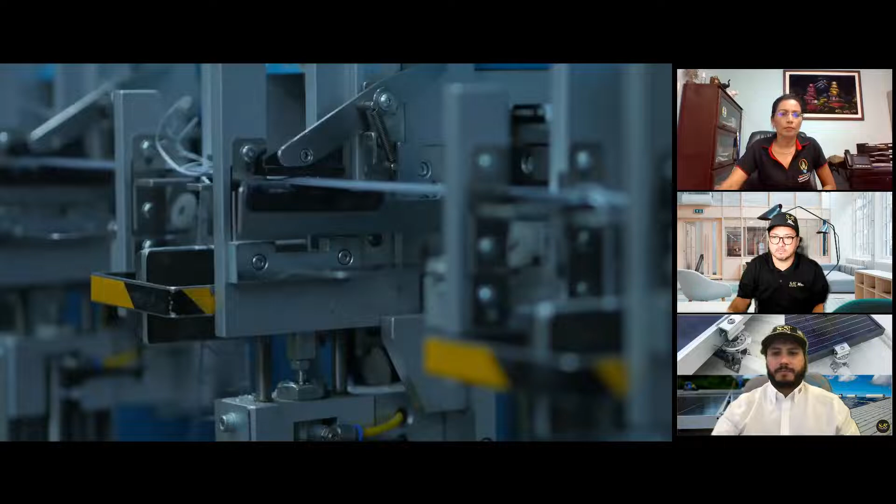We're proud of the USA, and we do prefer to manufacture in the USA, but moreover, we manufacture in our own facility. We control every aspect of it from soup to nuts. I'm very, very proud of that, and my employees are proud of that, and they strive towards that. Those people want to make good products because they stand behind it. Their names are on every box of part that goes out of that plant. They know what they're doing. Our name's on everything and our reputation's on everything, and that means a lot to us.

All of the employees are part of the family. They understand what they want to do, what they need to do, and we empower them to make some of their own decisions. We want our team to feel a sense of ownership, and that's what makes them more valuable to the company as a whole. They want to know why and how it's used, and because they do know why and how it's used, they understand how important it is to make it the quality product that it is.

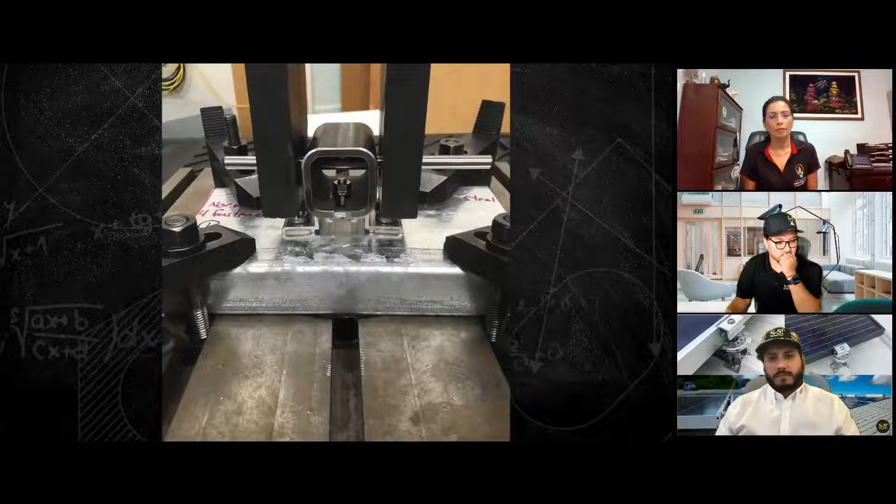We have a track record of doing what we do. There may be a couple of competitors who have been in business for as long or longer, but they can't copy that track record. They can't copy all the certifications that we have. They can't copy all the lab testing that we've done, and those kinds of things are important. We're in a constant program of innovation and improvement. We're changing and we're evolving and we're maturing and we're upping our game in every area of our business.

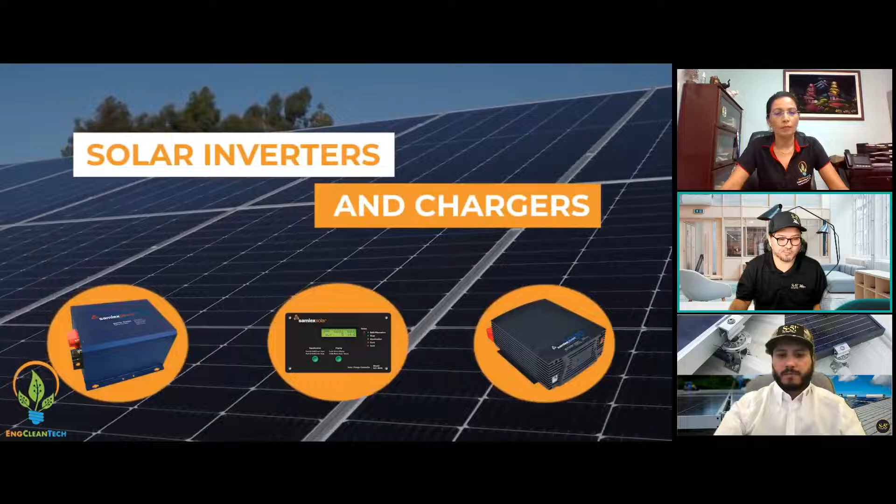Good morning, are you guys hearing me? Good morning, everyone. My name is Tara Manik, and I'm the Managing Director for Engineering and Clean Technologies Limited. We are happy to partner with S5 to host this webinar on the solar railless mounting, and to showcase the advantages and the applications and the benefits to its use in the solar industry. I will now hand over to JC.

Okay, thanks Tara. So a little bit of introduction. Engineering Clean Technologies are a new distributor in Trinidad and Tobago, that area, and that's why we are doing this webinar, in order to help with all the markets in that area and having a stock, which is something that we're going to discuss during the presentation, but we're going to try to keep stock in that area so it's easy for you to use in our products.

Okay, so a little bit of introduction of S5. I'm going to introduce our team that works internationally for Latin America and Europe, including Caribbean. Which is Alex Fuentes, I introduced you already, which is our field specialist. So you guys have any projects that need a bill of materials or anything like that, he can help you with all those things. We have Susan Guerra too, who is our marketing coordinator for LATAM, and she's helping us with all the marketing material that you guys need, or any image or whatever you guys need on videos, resources too.

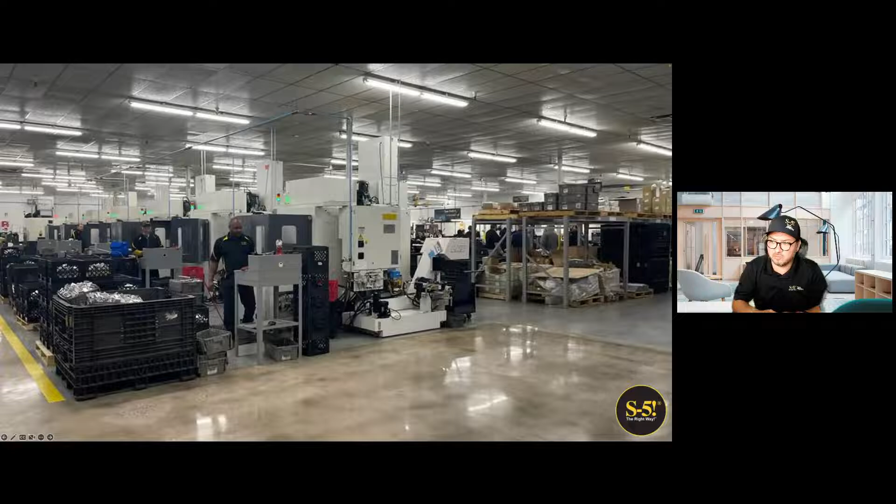Here you can see the interiors of our manufacturer where we control the whole process. This is critical for us. We are a manufacturer, we don't stock the products ourselves — we stock the products with our local partners and local distributors all over the world. Here you can see we have around 180 employees in total. And here's some of the shifts of the manufacturer, but we are continuing growing in the market and continue hiring more people as well.

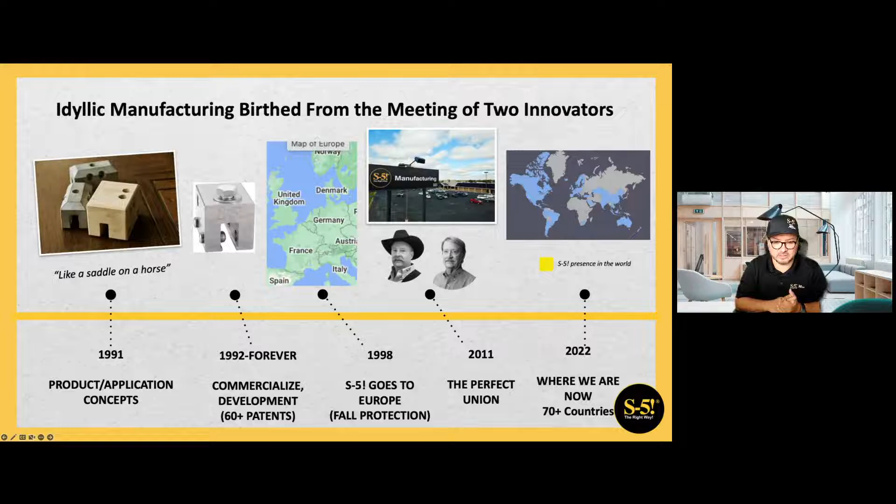We just focus on metal roof because that's where our expertise comes from. We don't do attachments for any other kind of roof, just metal roof. We know that metal roof is one of the best platforms to install solar or other products because it lasts longer and you don't have to do maintenance compared with other kinds of roof that exist in the market.

Talking a little about metal roofing types, there are two lines for us, or two types. One is the exposed fastener roof. We call it exposed fastener because you can see the fastener on top of the roof - it could be attached, you can see the screws maybe on the bottom, on the valley, on the trapezoidal shape, or on the top, on the rib of the roof.

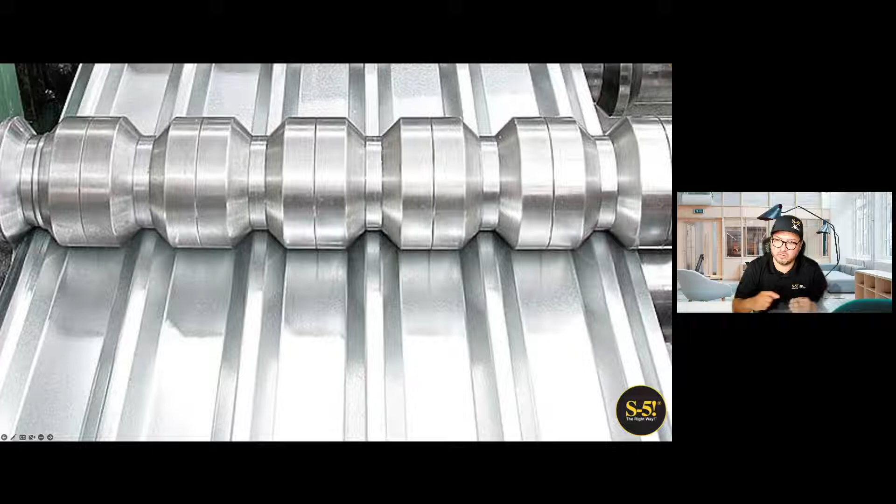This is what we call exposed fastener, and these are the most standard type of roof. They're manufactured this way - different roll formers have different shapes. The trapezoidal can change dimensions or shape as well - could be trapezoidal, or corrugated like this, undulated like this. But this whole line of products, it doesn't matter what shape it has.

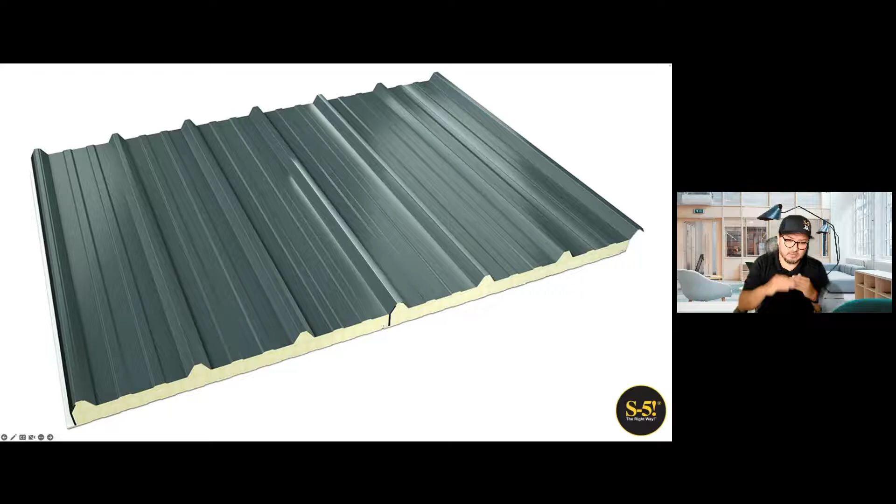If you have screws on the top, it means it's exposed fastener for us, and that means you need to perforate the roof in order to attach anything you want. We're going to talk a bit about that as well. This roof can be like a sandwich panel, or have insulation on the bottom, a double layer sheet too, in different kinds of shapes.

The other type of roof that exists is the standing seam roof, which is one of the best roofs that exists in the market. This standing seam doesn't have any screws on top - you don't see any perforation on top of this roof. You can't perforate it, you can't make any hole on this roof, because you void the warranty of the roof, and that's not really good for the owner of this roof.

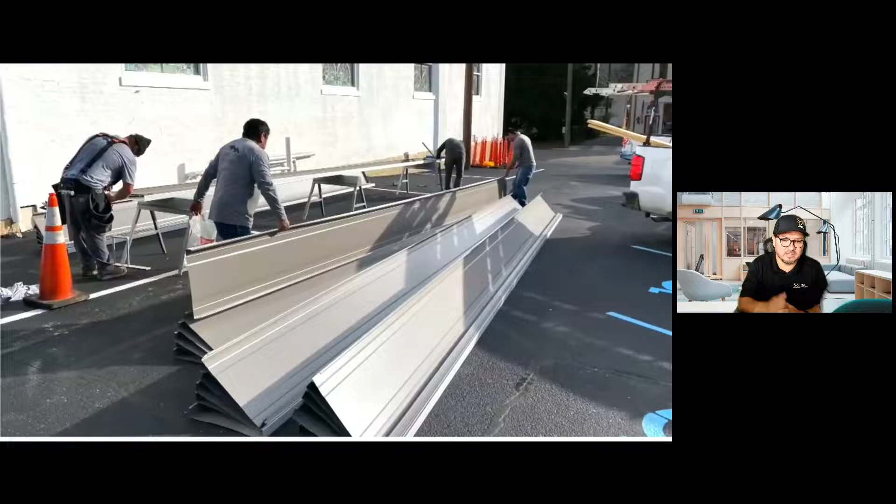These are called standing seam, and there are different kinds of shapes on the seam - these are custom made. They're made on site, on the same job, and they bring machines like this one where they make the whole tray in the field. This machine cuts the length of these trays to match the length of the roof, going from top to bottom. Different brands have different kinds of standing seam, but in general it's the same concept - you put a whole tray from the top to the edge of the roof, the bottom of the roof.

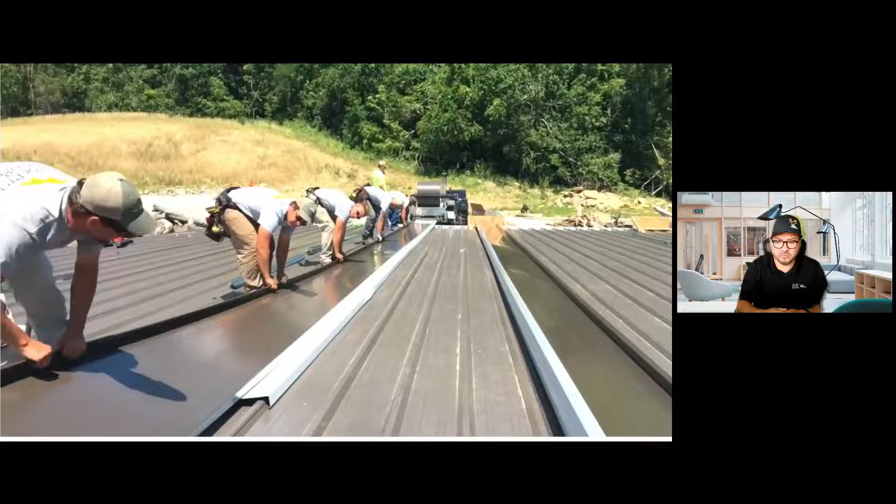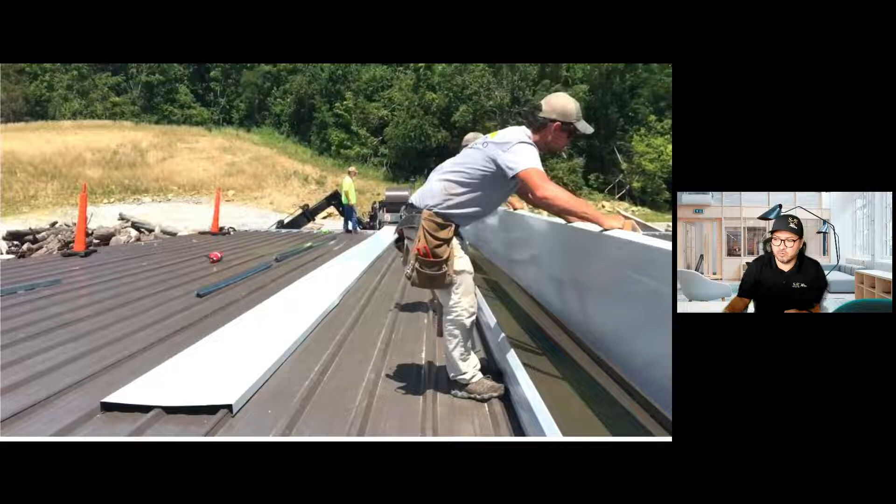So it's a continuous tray that doesn't perforate. These trays are fastened to the roof with clips - you can see the clips in the image. These clips are attached to the bottom of the roof, going to the purlin, or the wood deck or metal deck, whatever you have underneath the roof, and then you put the next tray next to it.

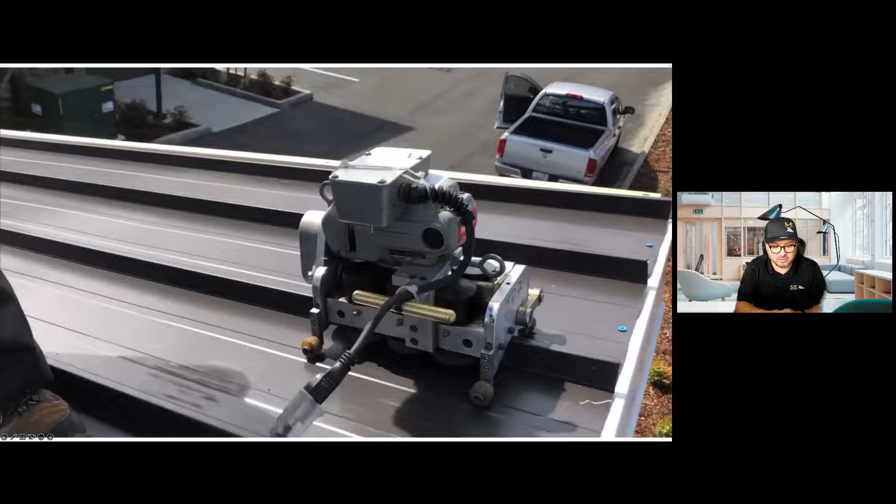After you put both trays together, there's a machine like this one called a seamer. What the seamer does is basically fold this seam, folding it and making it tight, and it has different shapes depending on the machine you're using. This roof is one of the best that exists in the market.

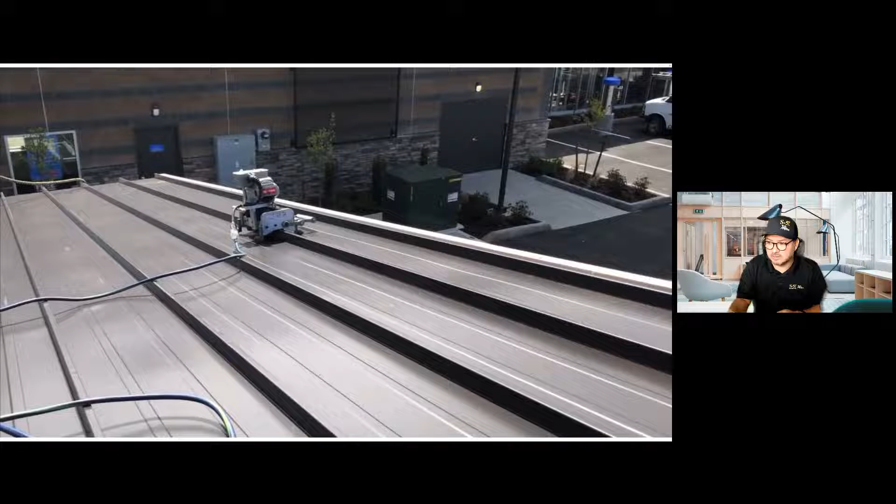There are different kinds of gauges - gauge is the thickness of the material, I'll talk a little about that as well. But this roof, you can't perforate - don't make any hole on this roof, especially if you're attaching solar to it. That's why we have a line of products that doesn't perforate it. Here you can see how they are installed.

The roof, the whole trays on the roof. You can see some polls that are showing up. You can answer yes or no, and submit that answer. Here's how it's being installed, these trays on the roof.

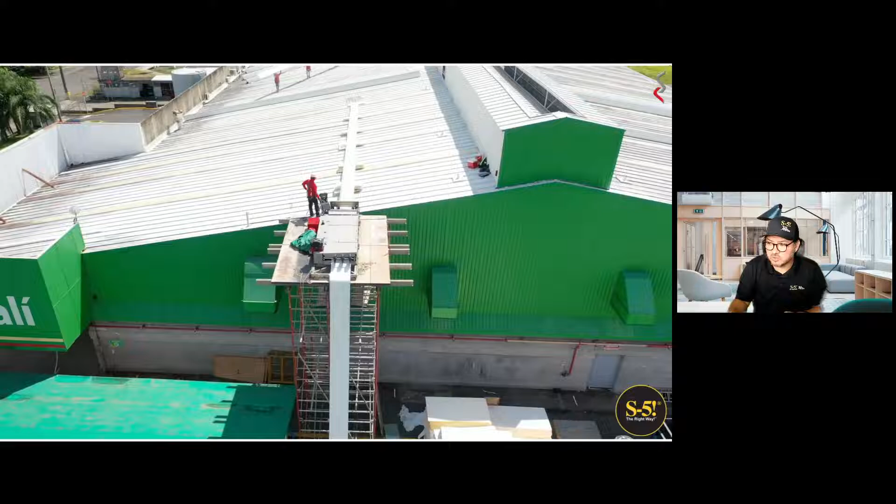So, as I mentioned, the metal roofing comes in different kinds of gauges, depending on the thickness. We have gauges that go between 22 gauge and 26. The most common ones are 26 and 24 gauge. Over 26, we don't recommend installing anything, because it's going to be too thin.

You will see that because you're going to go on the roof, and maybe the roof is going to bend, or it's going to make a hole just with your foot when you step on it. So you will see that. We don't recommend installing on gauges over 26, because it's too thin, and you're going to have issues with your solar attachment.

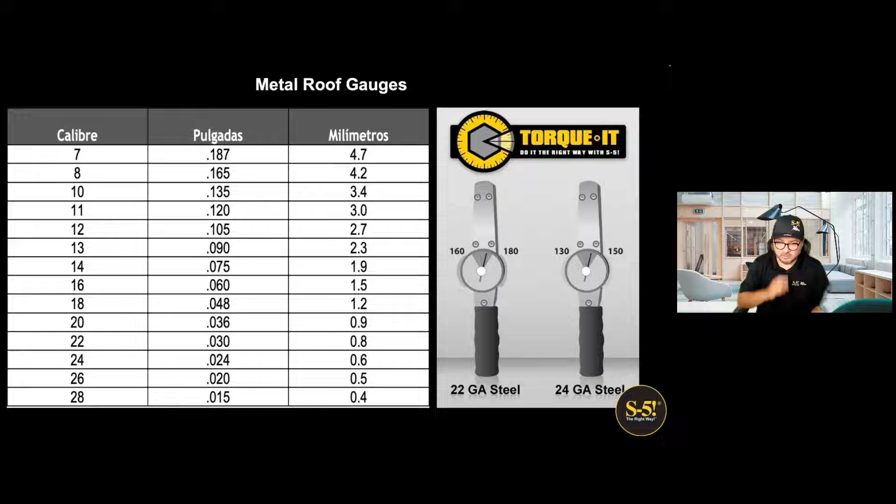And you know that this solar has to last at least 25 years on the roof. So you want the platform of the roof to last longer than that. Okay. So now that we introduced a little bit about metal roofs, we're going to talk about the different ways to attach on the roof.

From the beginning, the first installations on the rooftop, this image is from 1884. This is a project in New York. More than 100 years old, this photo, you can see how they started using the rooftop for solar attachment. And since then, it has changed a lot in technology and efficiency, not just on the modules, but also on the attachment and on the metal roof.

Okay, metal roofs are way better technology now. They are making better quality. As I mentioned, they have gauges 22 and 24 that are really thick and really last more than 30 years, depending on the location where they are.

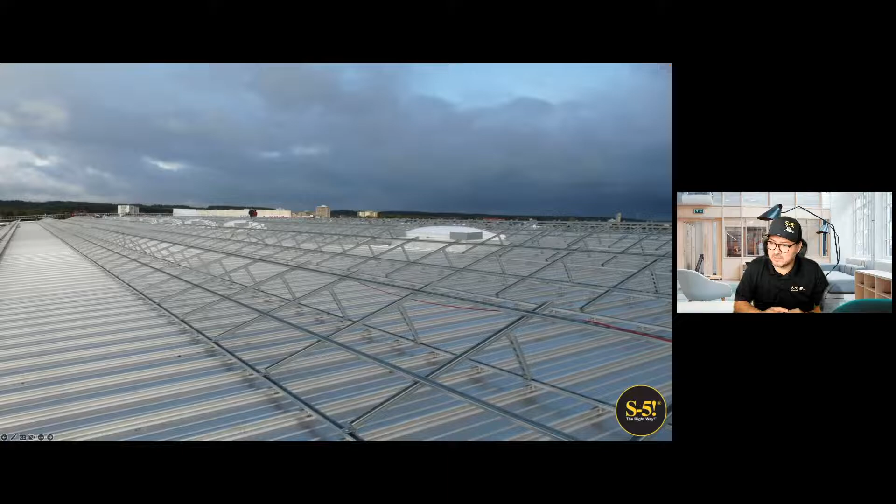So you can install in two different ways. You can install with a rail system on the roof, or you can install direct attach, basically directly on the roof without using a railing system. We're going to talk a little about that too. But for example, here you can see when you attach with rail, sometimes you want to tilt the modules a little so you can have more performance on the system.

The most important thing is how it's attached to the roof. We don't provide the railing system. We provide just the clamps so you can attach the rail to the roof. That's what we provide when we install on metal with a railing system.

Now the trend is changing from rail to direct attach, because a railing system costs more on structure, on all the railing and the aluminum and logistics and everything else. So that's why now, instead of investing, I don't know, $10,000 more on a railing system, they just do direct attach on the roof and maybe put more modules on the roof, and have the same performance that you want to get with a railing system.

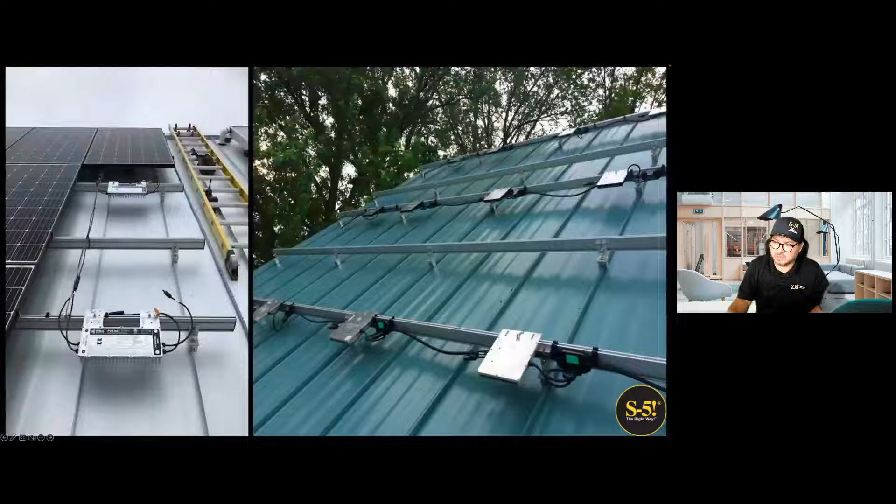Now the modules, as I mentioned, have better performance than before, so you don't need much change in degree angle to get the same performance you're looking for. If you attach on a railing system, besides doing it with tilt, you can do it flat like this. But as I mentioned before, the most important thing is how it's attached to the roof. In the Caribbean, of course, we're going to talk a little bit about the forces. When you use rail, you have more negative force on the modules compared with a direct attach.

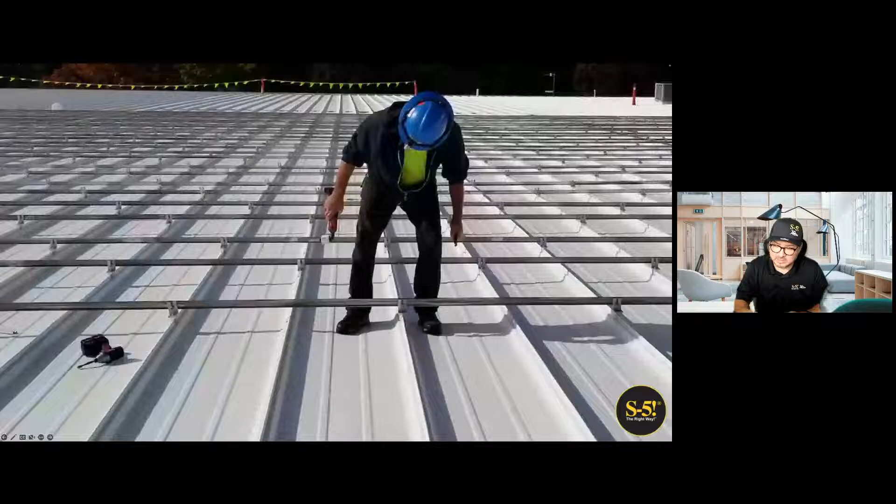Now talking about the different ways, when you attach with rails, what you can see here in the picture is like rail on top of rails. That's why the concept of direct attach is really important for us, and is a trend now in the market, because you can see you're adding more rails to a roof that already has rails. You can see on this standing seam roof, the roof already had the rails on it.

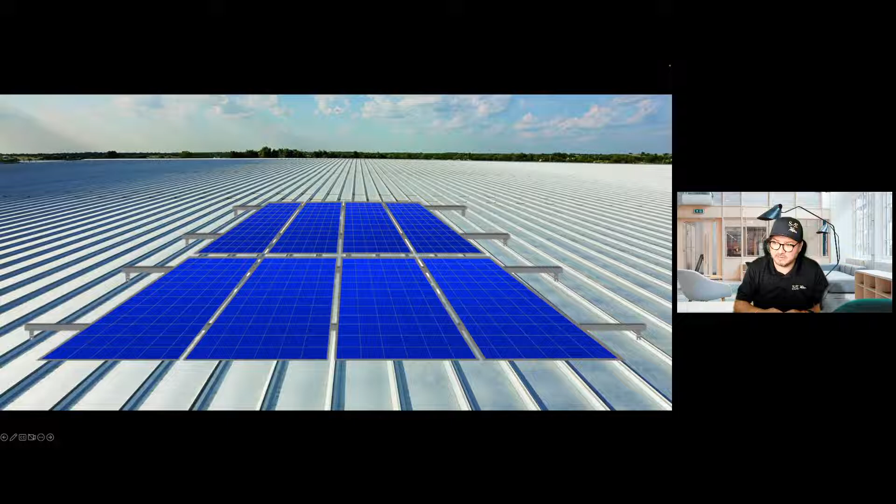So when you install modules on this kind of roof with a railing system, you put the rails perpendicular to the seam, and then you put the modules parallel to the seam, like this. This is how you install with a railing system, which everybody has been doing for a long time. Now the different technology that we have been using for almost 10 years is direct attach, on the same standing seam roof.

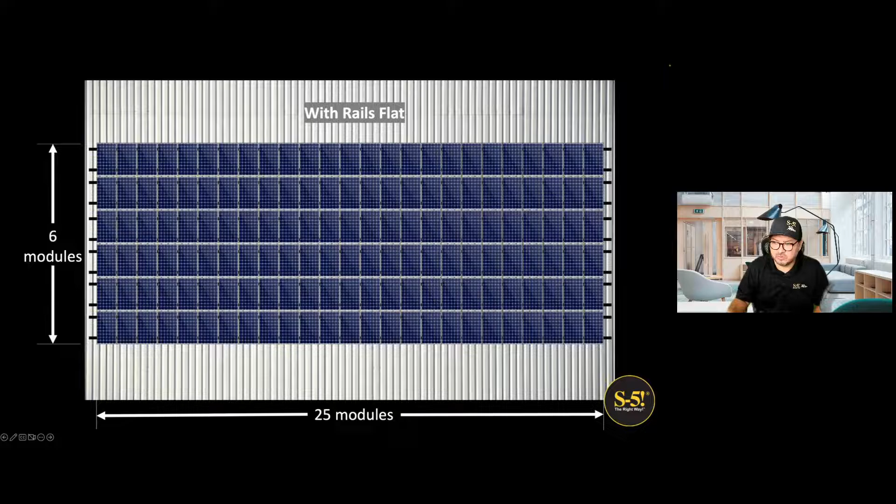So you can see here the modules are six lines of modules by 25 columns of modules. That is 150 modules there, with a rail system. If you want to do it with direct attach, no railing, just clamps directly on the seam, it's the same 150 modules. What changes now is you have fewer columns. You have 15 columns, and more lines, like 10 modules by 15 columns. That's the only difference, but you have the same 150 modules on this array.

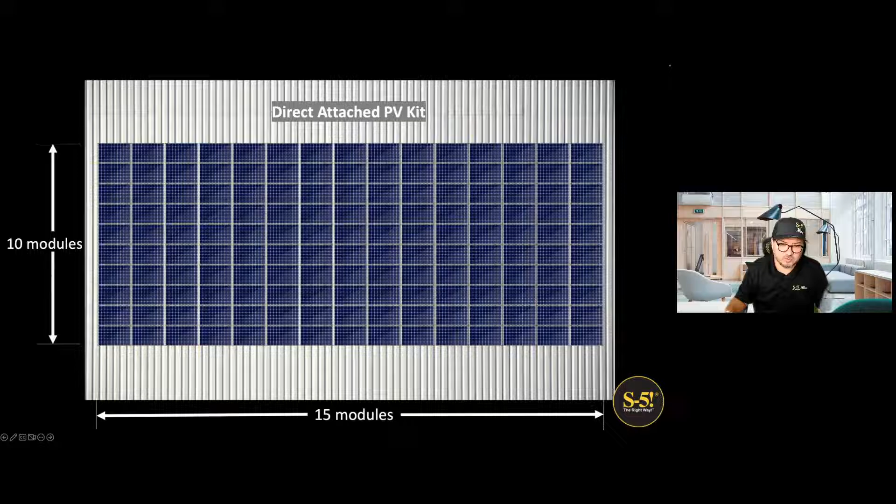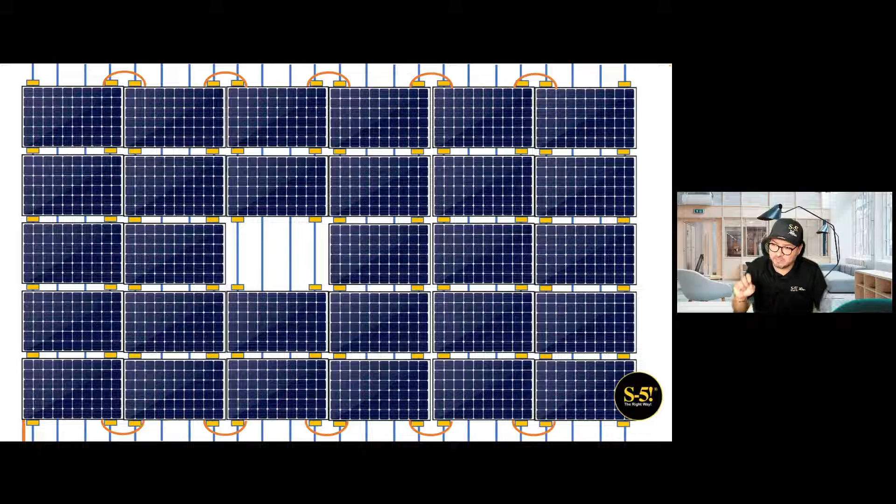To talk about the grounding on this system with the PV kit, we have different accessories that we use. You can see here all these yellow squares are basically our PV kit that I showed you before. And if you want to take out one of the modules in the middle to do maintenance, the whole system is still going to be grounded, because you have the PV kit, the disc, but besides that you put some bonding jumpers, which you can see in orange. Those are the bonding jumpers that we can use.

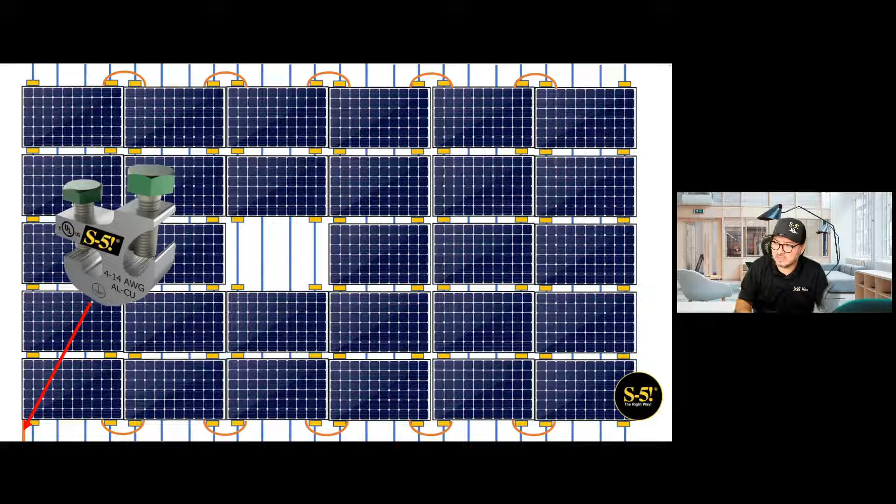Here are some of the other accessories that we use for grounding. You can see here the bonding jumper is the one in orange. We have clips that attach to the module underneath for wire management, and we have the grounding clips that take the grounding of the whole system back to the building, and the PV kit. With these 4 accessories, you have grounding for the whole system on the roof.

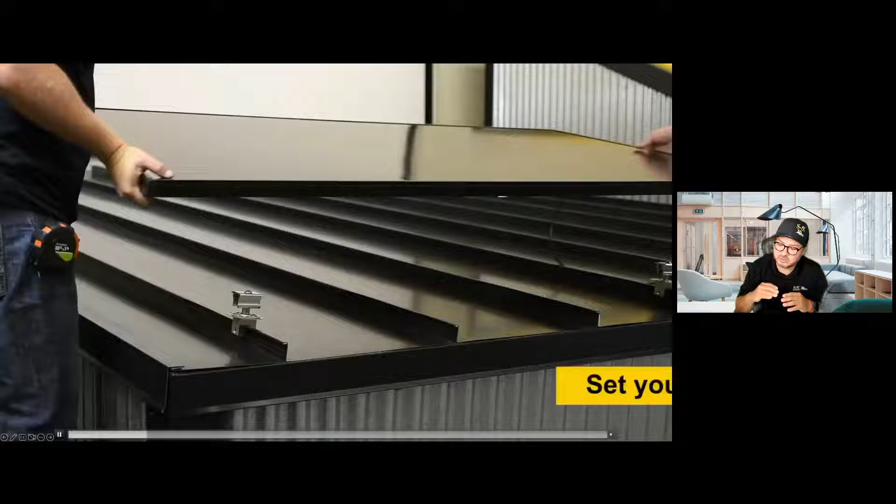Here we'll show you a short video about how to install the PV kit on standing seam. You can see the clamps. The first line is important, because it has to be square with the edges of the roof. When you square that line of modules, then the rest is going to be pretty easy, because the same module is going to give you the square of the roof. So you don't have to waste time squaring the whole roof in order to install the modules.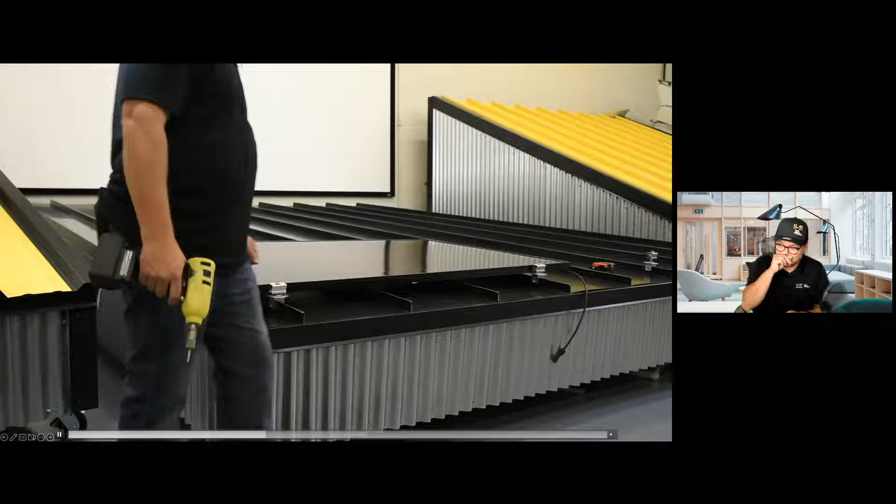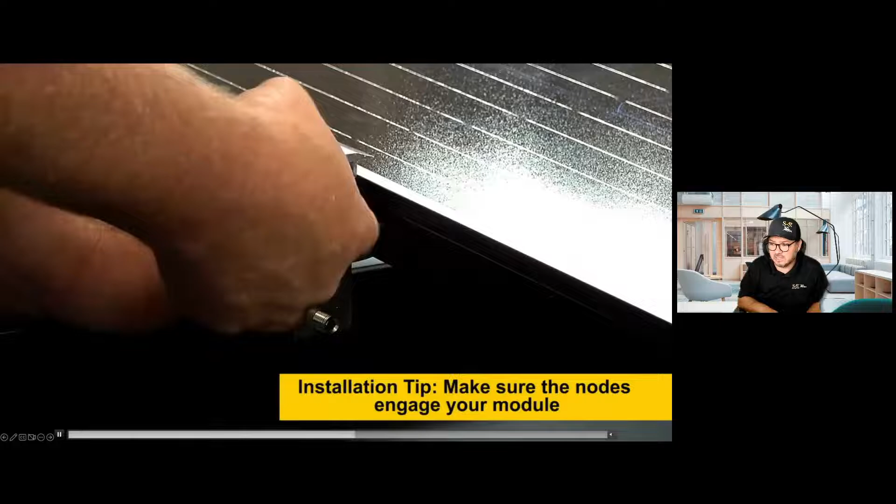So you just need to make sure that the distance is equal on the edges of the roof, and then from there to the top is going to be pretty easy. The installation with PV kits on a standing seam takes around a minute and a half per module. So it's pretty fast.

When you install on exposed fastener, where you have to drill the roof, it takes around 2 to 2.5 minutes per module. Compared with other kinds of systems like short rails, it is more than 3.5 minutes per module. So you are saving a lot of time in big jobs.

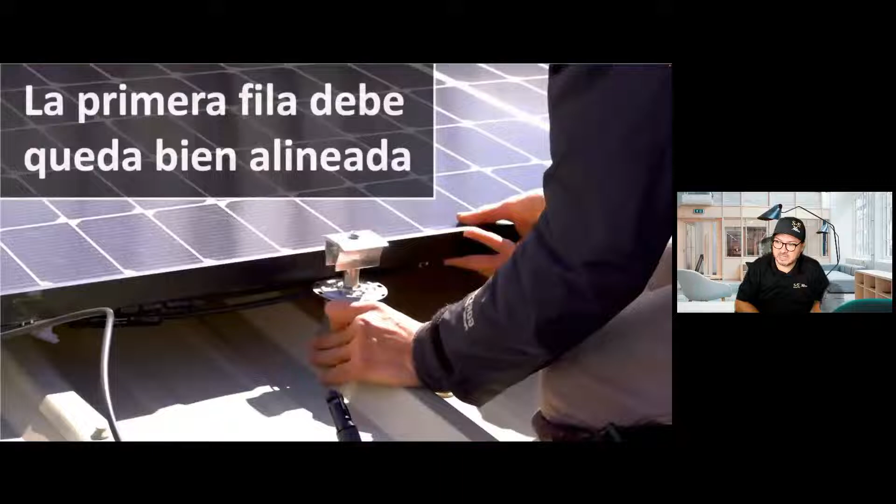So this is a standing seam roof with clamps, and we also have the same one but with brackets, which is an exposed fastener roof. With this exposed fastener, we use a different kind of bracket, but it's the same PV kit. It's just the bracket that is different, and the same concept. The first line has to be aligned with the roof. When everything is aligned, then you start installing the whole columns directly on the roof.

The installation is pretty easy. It's just taking a little bit longer because you need to screw down all the screws on the brackets, compared with the standing seam.

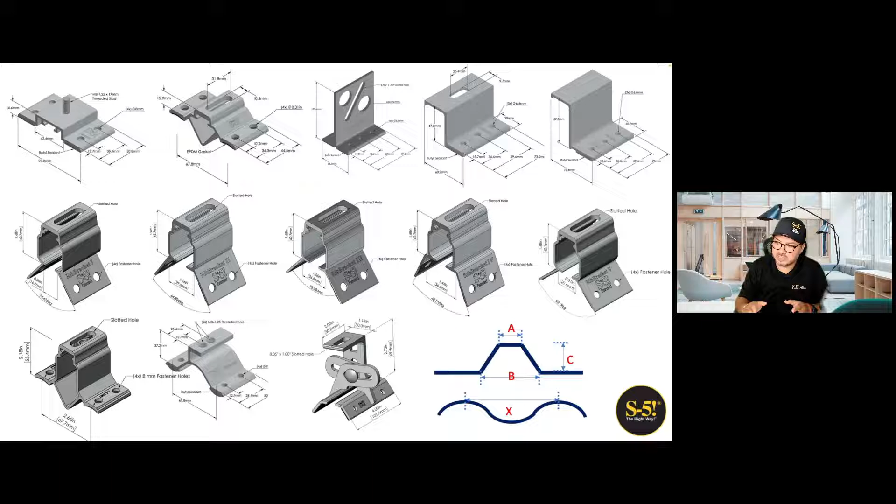And also, for example, if one of these rib brackets doesn't fit the dimensions that you have, we have our Protea bracket. We call it Protea because it means universal, so it adapts to any kind of trapezoidal shape. With this one, you can see it has an L shape on the top. That L shape we call L foot.

You can install rail on the top of this. It could be fastened on the bottom of the rail or on the side. It could be attached with this Protea bracket. All the rib brackets here in the middle, from 1 to 5, can only be installed with PV kits. You cannot install rails on top of those rib brackets because there is too much moment on the screws, because it's attached to the sheet only.

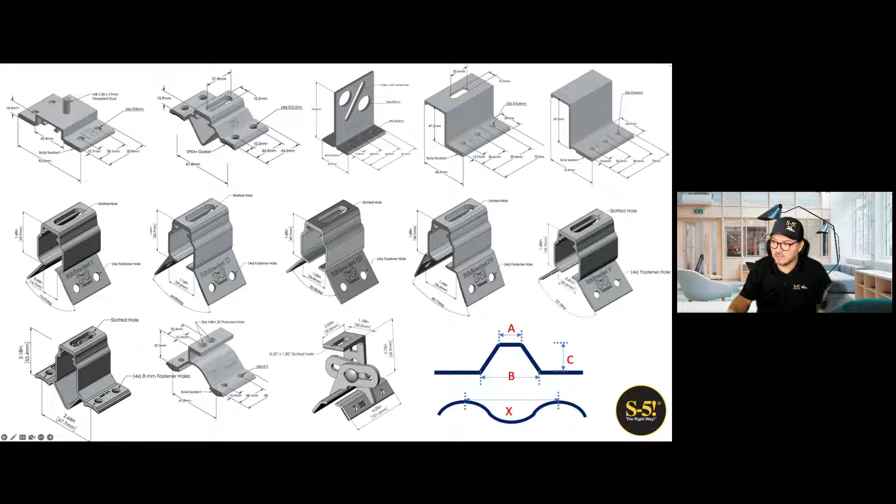What we do, compared with other solutions, is that we attach on the side of the rib. You can see here we created this rib bracket 5 for a roof Ternium TR 101. So we attach on the side instead of the top of the rib. When you attach on the top of the rib, you have less strength for negative force.

Negative force is basically the force that the wind has on the modules. So we have positive force, which is the weight, gravity, and we have negative force going up, which is what the wind does to the modules. On these, we use needle point screws like this one. We don't use just any kind of self screws. These are self-piercing screws, but they are needle point.

So what it does, this needle point, and you can see here in this image that even the screws, the tiny part of the attachment, have our logo on it, S-5!. It's because of the warranty. As Rob mentioned in the video, we put the name on everything. We are the only one that puts the name on everything because we are proud of the company, and also we know we have the best warranty in the market.

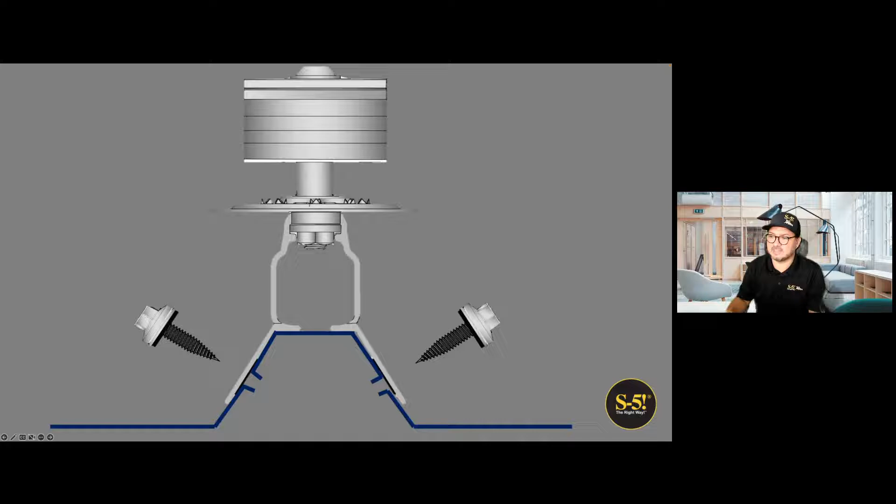Here you can see how you attach on the sides. So when you attach on the sides of the roof, what this self-piercing needle point screw does is it creates this kind of teeth underneath the roof, so it gives you more strength for negative force from the force of the wind on the modules.

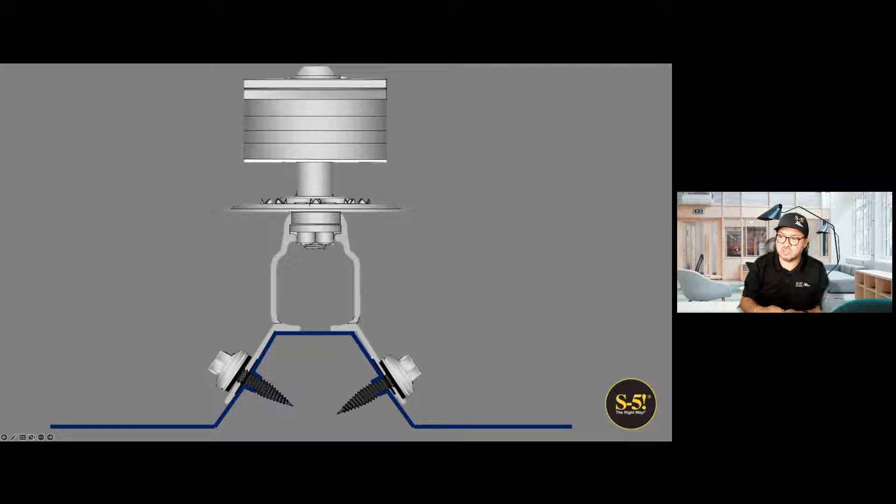So these self screws, the head is stainless steel, and the body of the screws is carbon steel. The carbon steel has a lot of strength for lateral shears. So if you want to break the attachment, you need to basically cut the screws. The only way is to break every screw and basically break the roof before anything else.

So that's the difference when you use, for example, short rails that are just attached on the rib. With short rail, you have less resistance for negative pressure compared with the PV kit. So you can see it here.

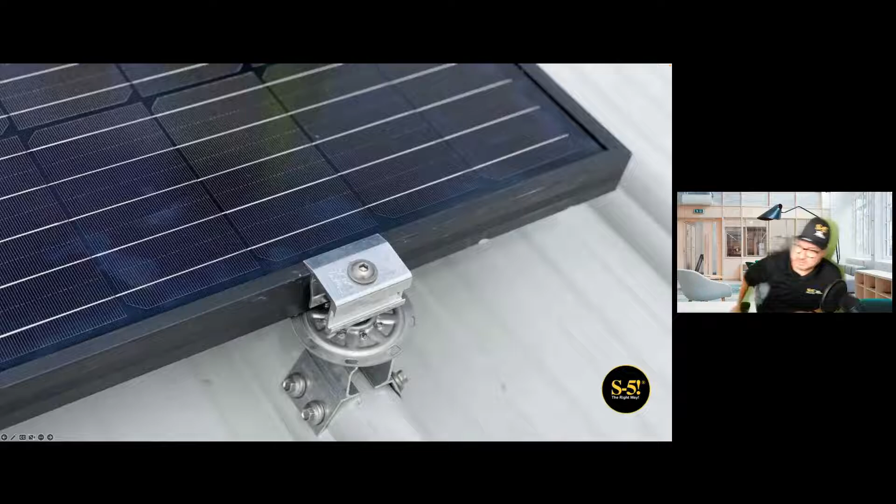If you see this kind of roof in your market, this is perfect, because these roofs are designed to isolate the heat or the cold from inside the building. So you don't want to perforate or install anything that passes this insulation. Our system is attached only to the sheet, not to the purlin.

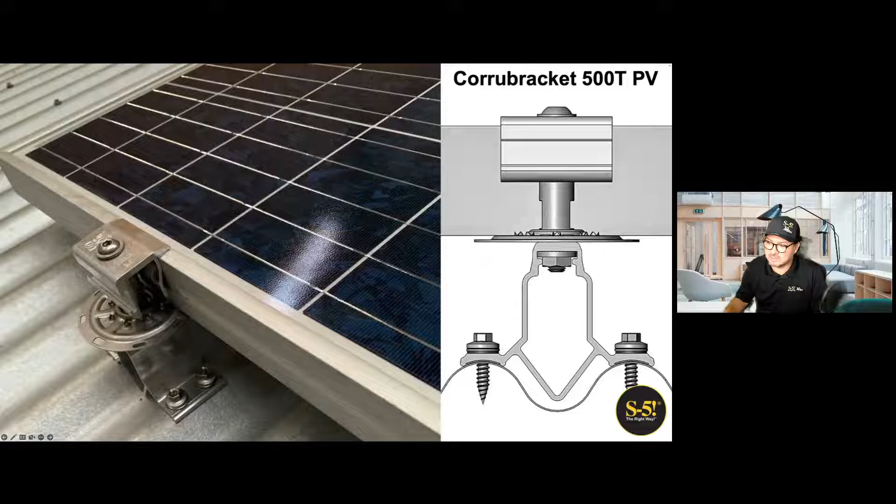The same thing, we use a CorruBracket for this kind of roof, which is more common in residential but not in commercial, because it's not the best roof, but we've seen it sometimes in residential areas: the undulated roof. Also with our brackets, you can do wire management pretty easily.

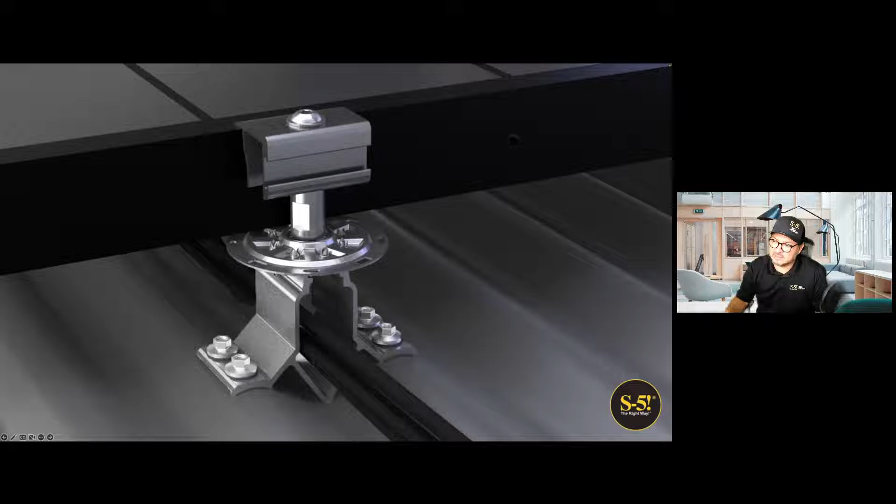And also I know one of the questions that most building owners and installers are concerned about is waterproofing, that it doesn't leak the roof, especially in areas that rain a lot, like in the Caribbean, like in your market. You want better products with a water seal that doesn't leak water inside the building. That's why we do the best testing in the market, which is the ASTM E2140.

This test is static water pressure. Basically, you put the bracket with just the seal that we provide, the seal that comes with the brackets and with the screws. We do the test with just those seals, and we put it under 15 centimeters of water pressure for 6 hours. After 6 hours, it can't leak anything. If it leaks, it doesn't pass the test.

So this is an image of the testing that we do, and this is the hardest test that you can use on this kind of product, because there is another one that is a dynamic test. That's basically water running on the roof, but it doesn't have any pressure. Here you have 15 centimeters of pressure on each bracket.

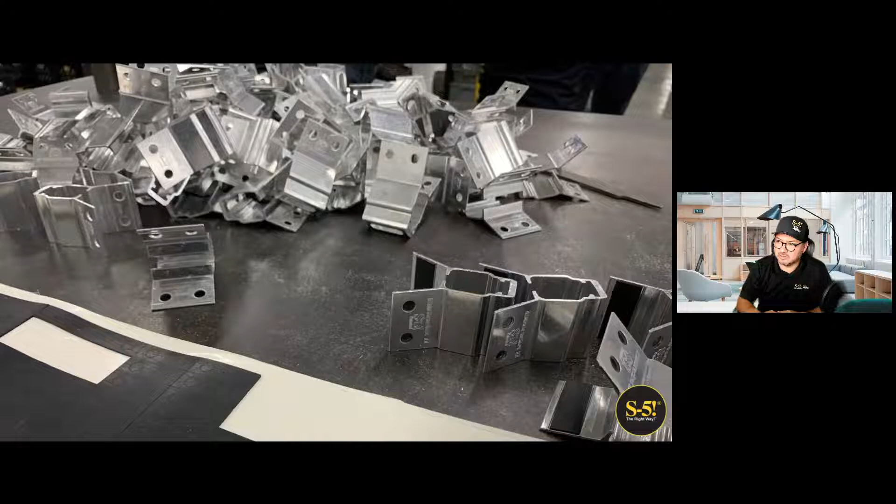So here you can see that the rib bracket uses a closed cell EPDM, not open cell. The closed cell EPDM is attached by the manufacturer, so we attach it directly on the brackets.

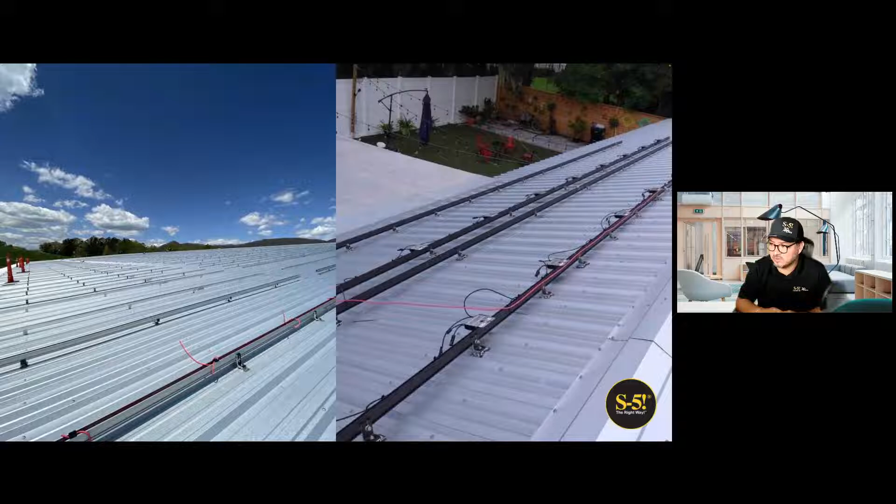So it comes with those seals already applied. Also, when you attach on the purlin with the other kind of solar foot, you can attach with rails as well, but it has another kind of seal that is like a butyl seal. It's not an EPDM. And here you can see a picture of a project installed in Jamaica.

We installed this recently. They were installing; they have not finished the job yet. It's out of the oven. This picture, we just got it. And you can see here in Jamaica there is strong wind as well, like in Trinidad and Tobago in that area. So they installed this Protea bracket with PV kit, and they installed 3 PV kits per module instead of 2, because for the strength of the roof they needed more attachment. Okay, that's one of the projects that we installed.

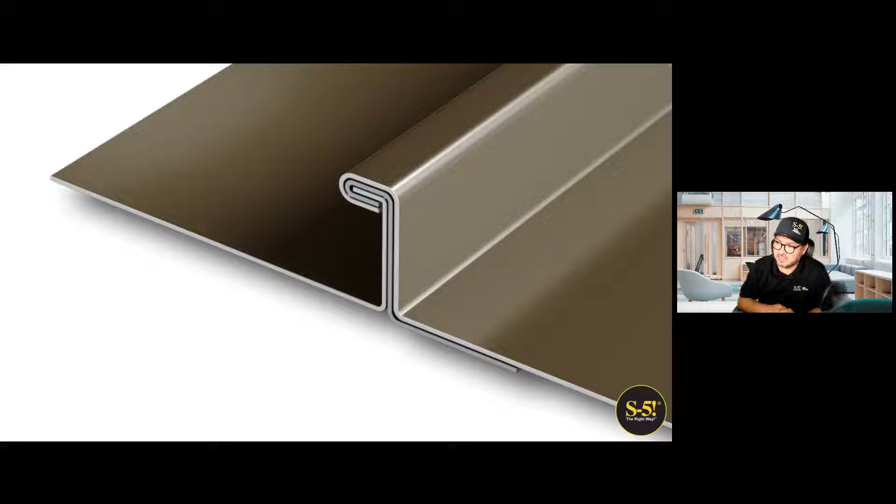And here is the standing seam. A standing seam doesn't perforate the roof. These are all the types where it could be installed. As you see here, it could be a single fold, as in this image, or it could be a double fold seam like this one. This double fold is more common in that market in the Caribbean because it's stronger than the single fold. This standing seam roof could also be insulated, like a sandwich panel.

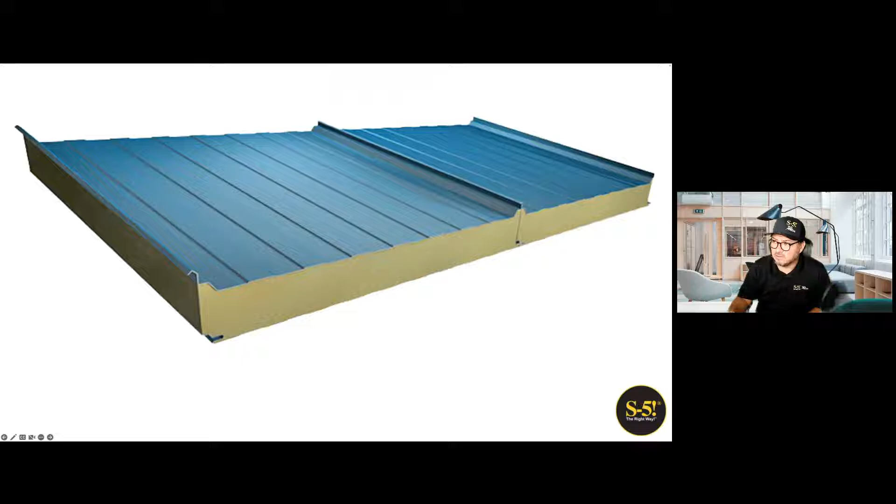On our website there are some tools: if you don't know what kind of roof it is, you can see the shape of the roof, and then see which clamp fits it. If not, just send us some pictures and we can help you. Hopefully you send images with some dimensions, some reference, so we can see which clamp works for you.

In terms of clamps, we have 2 different clamps. We have mini clamps that are made for solar, and they have been tested for negative force, negative load test. So that is the mini. We use just one set screw that goes on the bottom. And for other kinds of products that have lateral shear, for example if you're going to use fall protection, or you have an AC unit that you're going to put on top of the roof, you can use the standard clamp, which has 2 set screws like this. So it's been tested in different ways.

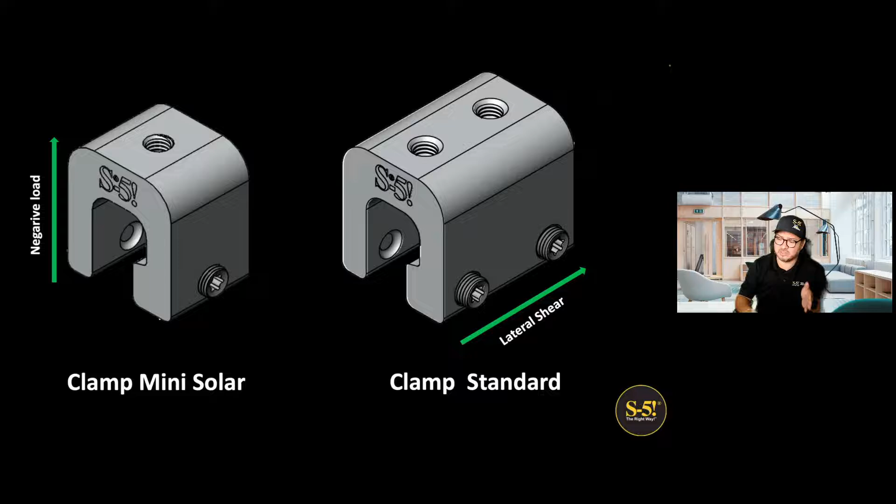And with this kind of product, in the end, it gets loose. You need to go and maybe review or check the torque on the screws, because it gets loose with time. You know that a metal roof is kind of like a living product, because it moves with temperature during the night and during the day. So again, this makes these friction products get loose with time.

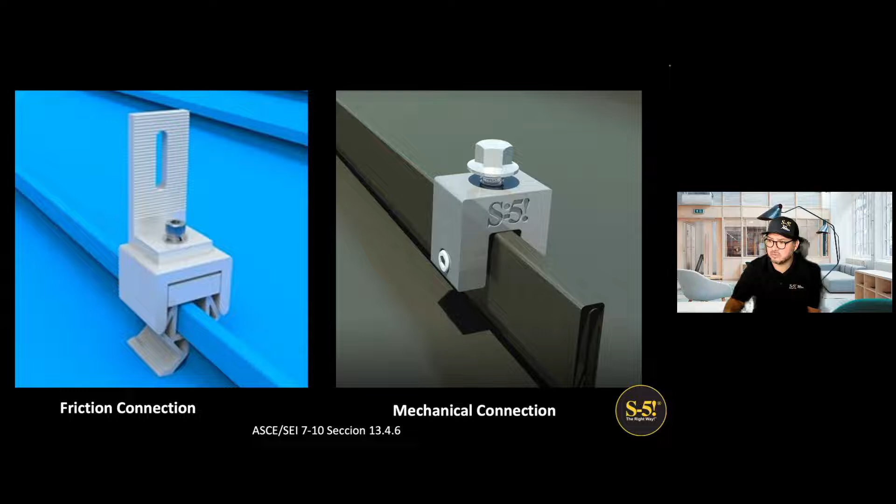Our mechanical attachment, which is our clamps, according to ASCE 7-10, uses the mechanical attachment like what we show here. What it does is the set screw has to deform the standing seam to create this mechanical attachment, and you can see it deforms a little bit, but without damaging the galvanized coating or whatever is protecting the steel from the roof.

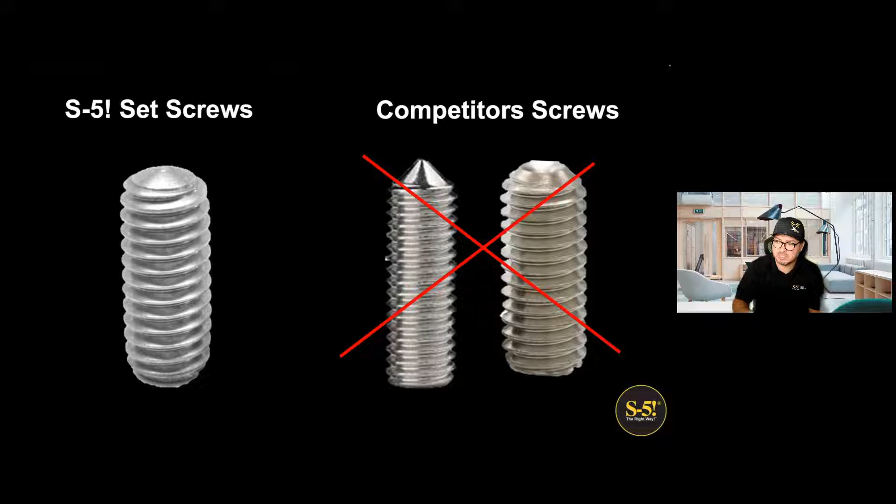That's why we have a set screw with a round point. You can see our set screw is round compared with competitors' needle points or cup shape screws. You want to avoid those kinds of screws and use the round shape instead, because cup shape screws damage the roof.

Imagine for all the clamps you install on the roof, you're going to have a lot of points of corrosion, and then you damage the whole roof on your job. So you don't want that, you want to try to avoid it.

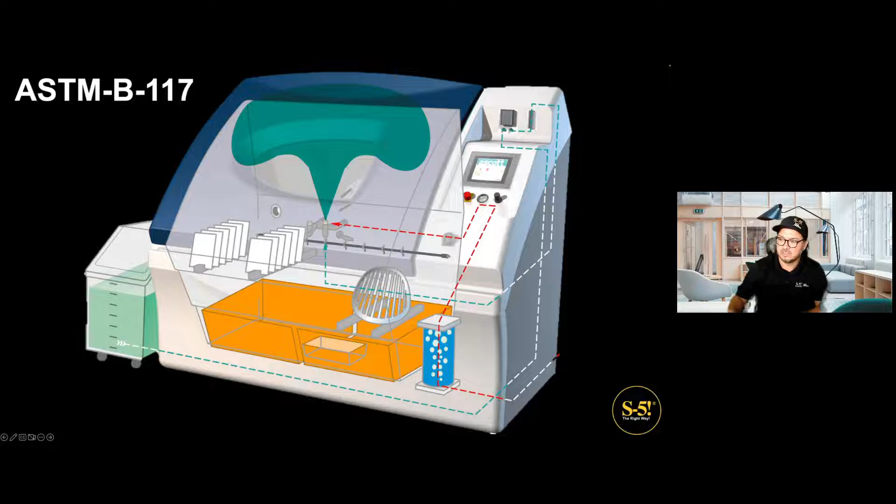For the aluminum we use, it's aluminum 6061-T6, which is the best aluminum you can get for this kind of product. We also doubled this testing to 2,000 hours of salt water. After 2,000 hours, the roof is already gone - it's rusty and oxidized - but our clamp still maintains the mechanical attachment on the roof.

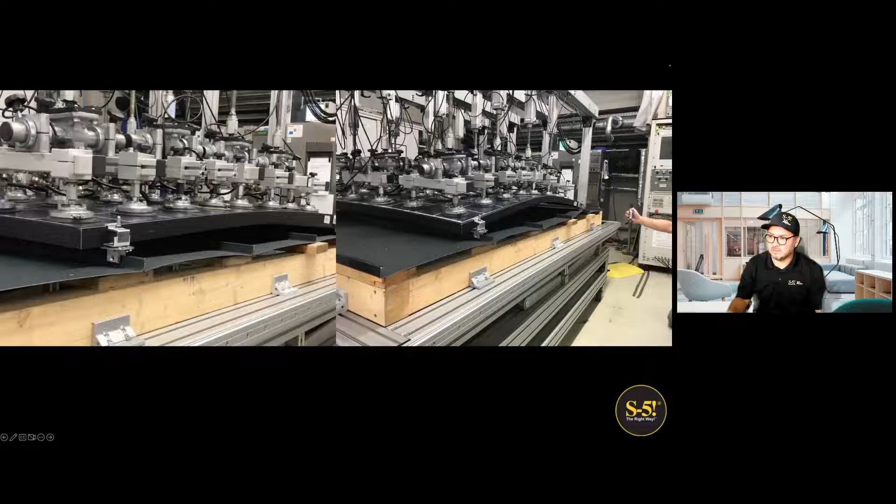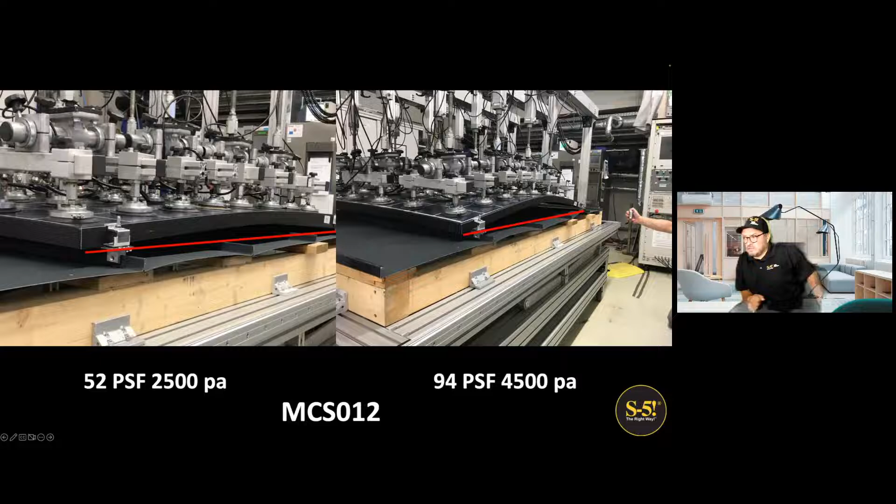That's why we test our products in different ways. Here you can see how we test the modules with negative pressure.

This is a testing that we did in Germany to do some tests in Europe. What we did, we tested the whole sandwich - the roof, the clamp, and the modules. You can see here that the module is already at 2,500 Pascal of negative pressure and is already collapsing, but our attachment and our clamps are still there, solid, with no issue. That's why we test with negative pressure instead of wind, because wind is not really accurate.

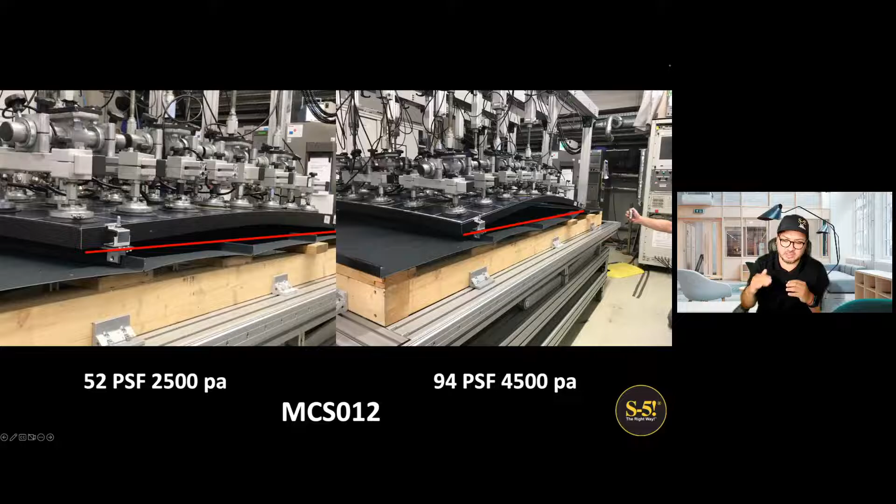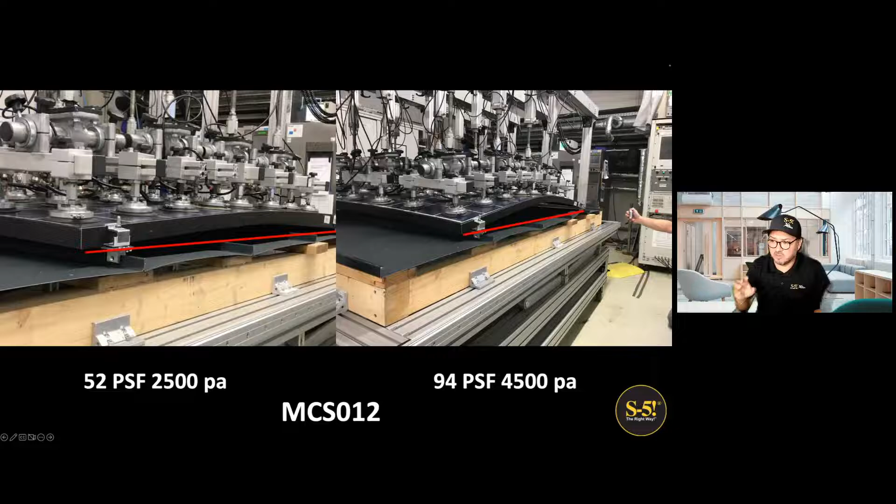For example, wind like 100 miles or 100 kilometers per hour on a 10 meter high building has different pressure than on a 20 meter high building. It's the same speed, but different negative pressure on the roof, depending on the condition of the roof - how high it is, if it has parapets around it, if it's surrounded by other buildings, or if it's an open space. That's why there are a lot of aspects that affect this negative pressure. That's why we don't talk about wind, we talk about negative pressure, as you can see in the image.

We test the clamp in different ways. The mini clamp is testing negative force, and the standard clamp is testing lateral shear. You can see here in the image two different kinds of performance on the roof.

Also, we can do this testing on the same roof. When we don't have a sample of the roof, we can go and test it directly on the roof to see the strength of the clamp.

This concept of the PV kit, which is a direct attach, means you just need 10 centimeters of separation from the roof for the modules. With that 10 centimeter gap from the roof, it doesn't decrease the performance of the modules, but it increases the resistance to the negative force that wind has on the modules.

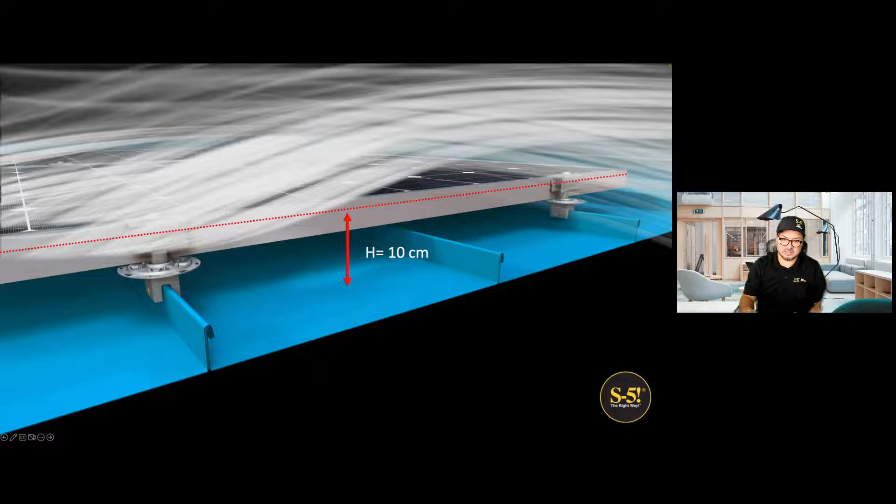It's the same effect that happens with a Formula One car - it doesn't have much gap between the ground and the car. So what the wind does, instead of making negative pressure on the car, it creates positive pressure, pushing the car down instead of up. It's the same thing with our PV kits - instead of having more negative pressure, the wind pushes down the modules because of the distance it has with the metal. That's why it increases the performance and resistance for strong wind.

In general terms, I would never recommend installing a railing system in Caribbean areas, or a tilt system with rail. We try to make it as low as possible in order to avoid the negative pressure that you have. You can see here on the same roof, you have different kinds of pressure depending on the zone.

This is according to the ASCE, the 7-10 or 7-16, depending on what your country uses. You have zone 3, zone 2, and zone 1. We try to avoid installing in zone 3, which is the zone with more negative pressure, and install your modules in zone 1 or 2.

We have another kind of webinar you can sign up for, just on wind uplift - this is about negative pressure, this wind uplift. Each of these topics that we've mentioned, we could talk about for hours, but for the time we have today, we're just going to do an introduction to each topic that we can go deeper into.

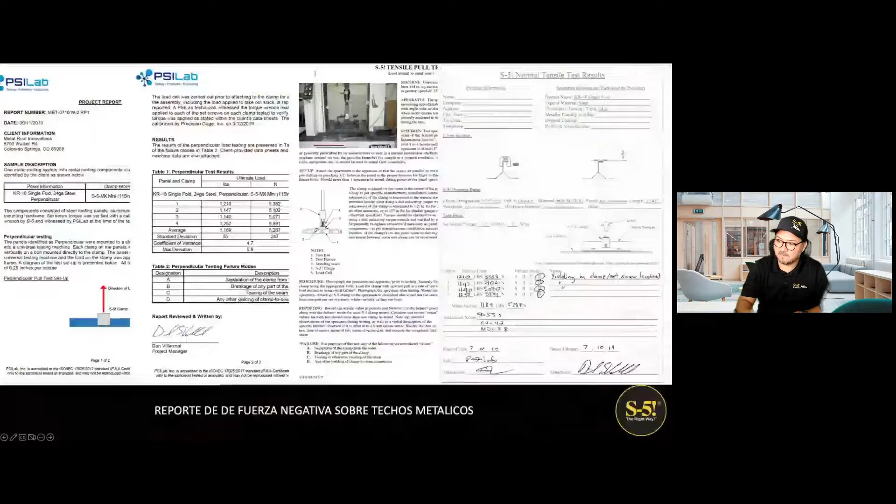Here you can see, if you haven't seen a test report before, here's a test report, and you can see it's pretty complete. We do it with a third-party lab, and that helps us see the resistance for negative force on each clamp, depending on the roof.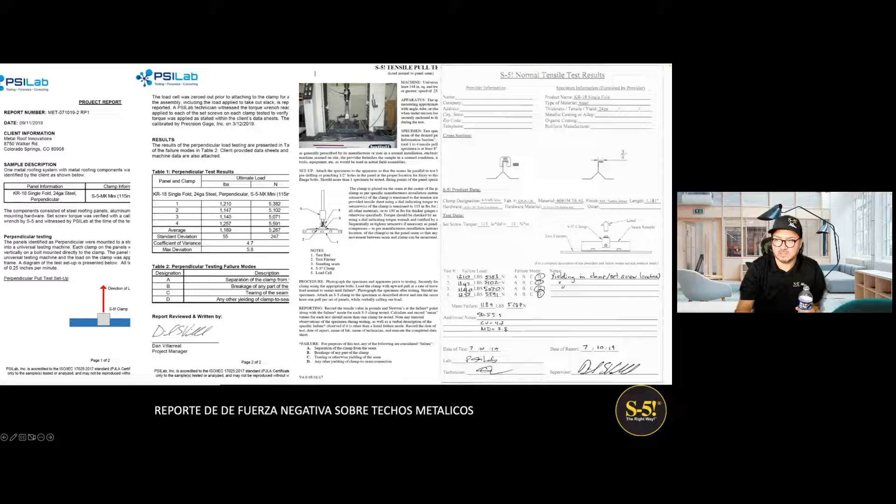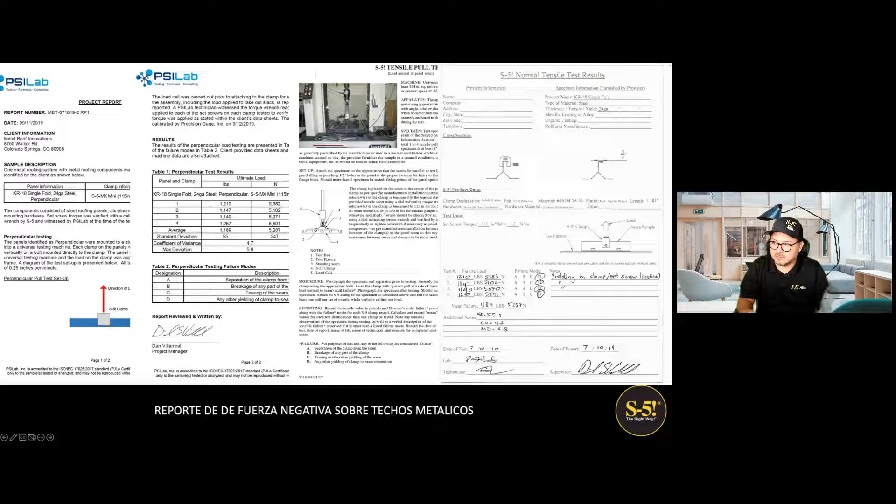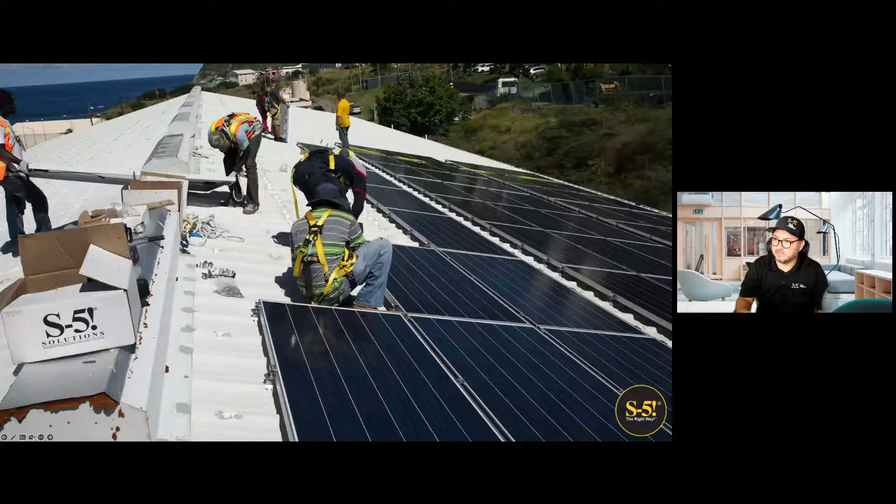To finish now, since we're almost out of time, we're going to show you some projects we've installed in the Caribbean. You can see different roofs here. This one is in Colombia, in an area close to the Caribbean. Here you can see some in Costa Rica, also in the Caribbean. And here's another Walmart in Central America.

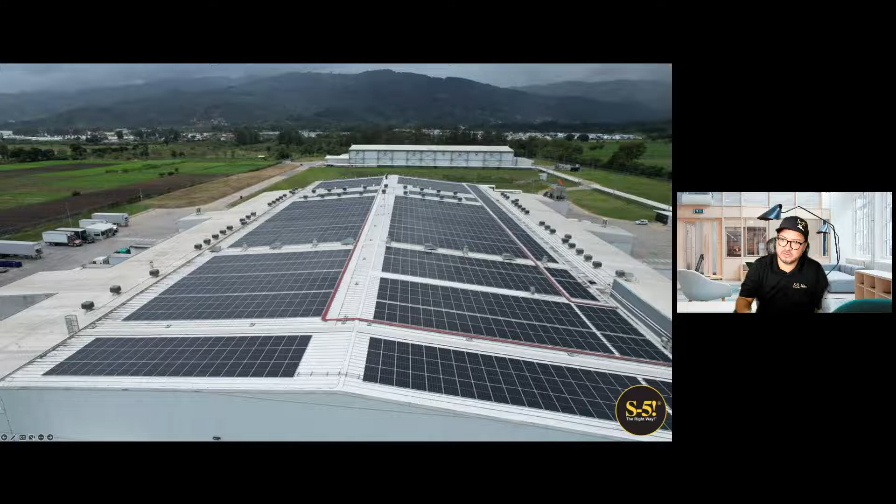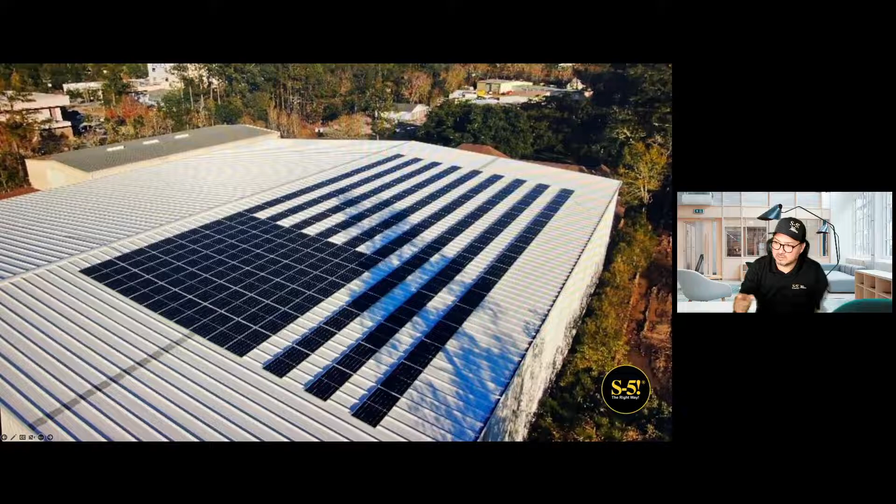All this is 1 megawatt. Another building—we are specifying all the Walmart buildings in Central America and America, so most of the Walmart roofs have our system. With our PV kit, it's flexible. You can do these kinds of projects and make different designs because of this.

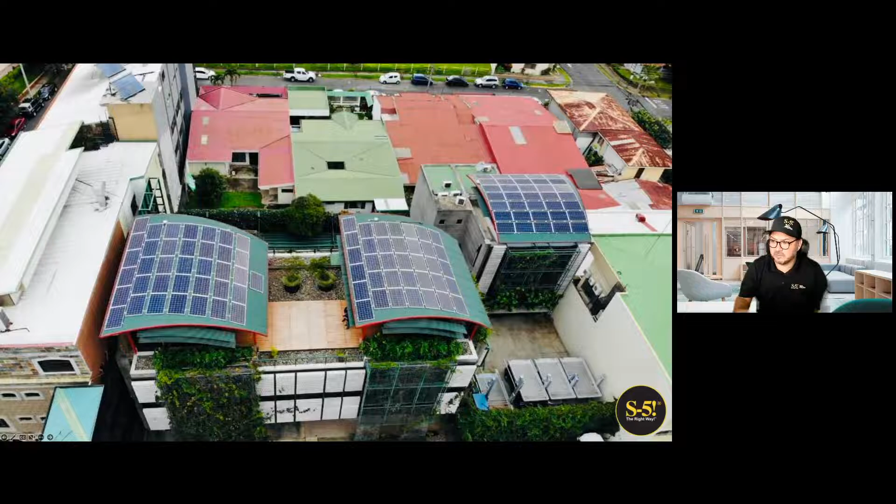It's also really good for curved roofs, because we don't use rails—we just install the PV kit according to the radius of the roof. Here you can see other jobs in Mexico, also in Central America and more in the Caribbean.

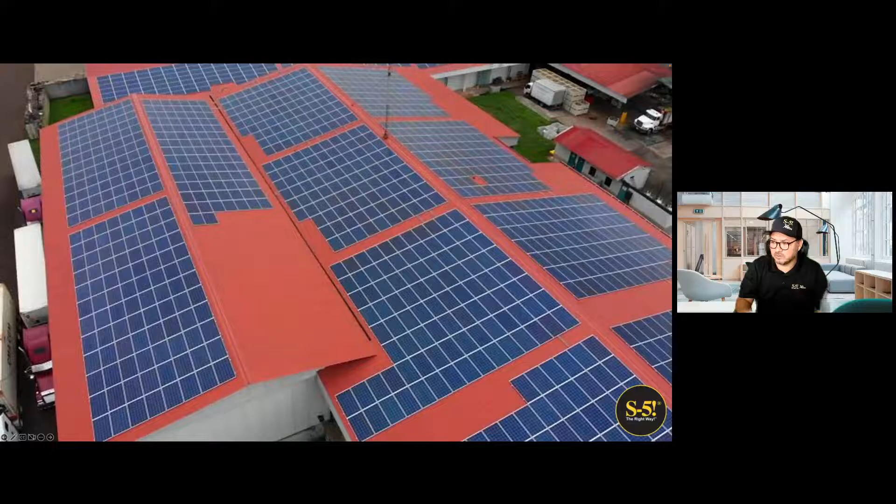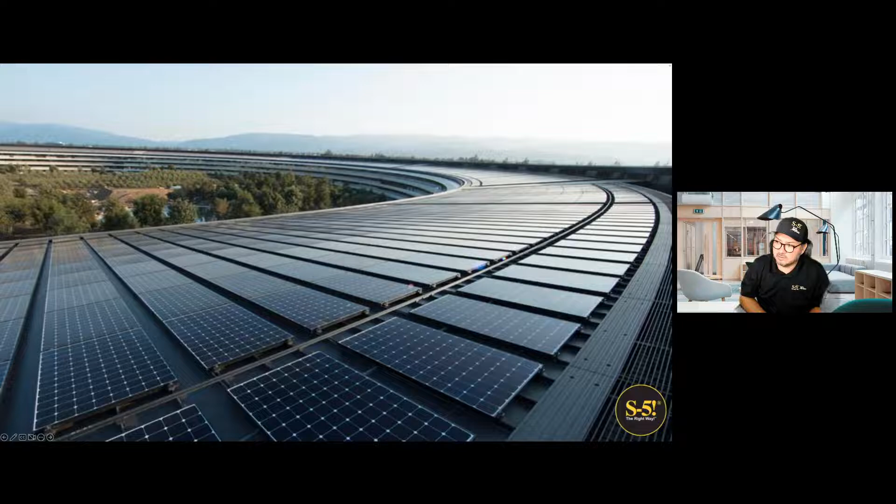Just on top of this roof, we installed across this run, because it's a whole campus. In the whole campus we installed 17.4 megawatts, but just on the roof, on the circle in the middle, we installed 7.4 megawatts. We were the only one approved to install on this kind of roof, because of our certification and warranty. We put around 10 kilometers of walkways and fall protection line on this roof.

There were questions asked about whether we have products for other kinds of roofs, like concrete roof or tile roof or Spanish tile. No, we don't have anything for those kinds of roofs, because we focus on what we are expert in, which is metal roof.

It's like when you go to eat sushi, you go to a sushi restaurant—you don't go to a buffet to get sushi, because they're not going to give you the best. So we leave the buffet to the distributors, so they can offer multiple solutions. But as a manufacturer, we just focus on what we do, which is the metal roof industry.

Tara, Alex, Kimberly, everybody—yes, we're here. Okay, so we had Tara... Tara, you're on mute, you want to say hi?